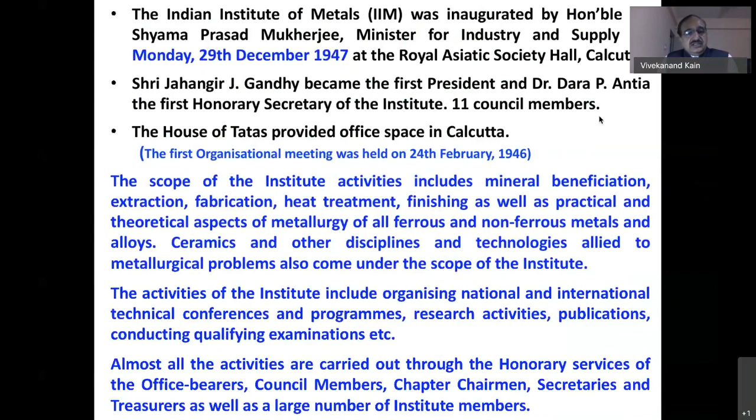At that time, several international institutes, including the Institute of Metals UK and the Institute of Iron and Steel UK, advised that India should not go for separate institutes for each subtopic in the field of metallurgy and materials. Therefore, right from that stage, the scope of the institute included all topics such as mineral beneficiation, extraction of materials, fabrication of materials, heat treatment, finishing, as well as practical and theoretical aspects of metallurgy of all ferrous and non-ferrous metals and alloys, including ceramics and other disciplines and technologies which come in the broad field of metallurgy and materials.

The vision of the institute includes increased global visibility for the IIM, cooperating with related government departments on policy formulations, focused services to industry with higher degree of industry-specific interaction, as well as career development and encouraging young metallurgists. The annual general body of the Indian Institute of Metals is typically held at the end of July every year.

And so last month itself, we had Dr. Amol Gokhale taking over as the president of the institute.

As I told you, the institute has three divisions through which it operates: Ferrous Division, Metal Sciences Division, and Non-Ferrous Division. The Ferrous Division is chaired by Shri T.V. Narendran, who is also the Vice President of the Institute. The Metal Sciences Division chairman is Dr. Samir Kamat, who is also Vice President of the Institute. And Mr. Satish Pai is the chairman of the Non-Ferrous Division and Vice President of the Institute.

The Indian Institute of Metals has more than 10,000 members.

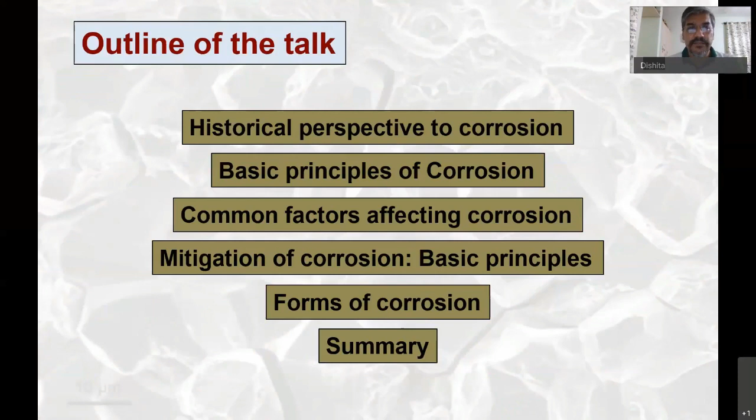So this is a brief outline of the talk. I will start with the historical perspective of corrosion. Mankind from history had a requirement of tools and weapons in their day-to-day lives. In the new Stone Age, starting around 10,000 BC, stone was used for tools and weapons, and the problem of corrosion was not faced by humans at that time because stones, being found naturally, are not prone to corrosion. The problems of corrosion started with the onset of the Metals Age, which was the Copper Age around 5000 BC, then to the Bronze Age.

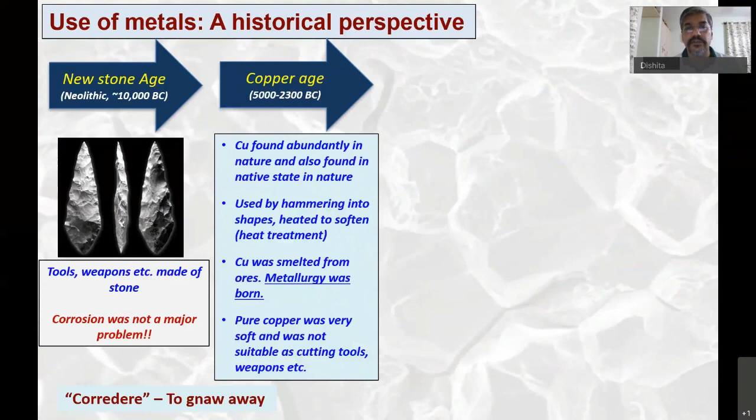In the Copper Age, initially copper was found in its native state. It was much easier to work with in comparison to stones. You can just beat copper into the shape that you want. Humans also found that by beating copper, it hardens, so it was heated to make it soft. Metallurgy was born when copper was smelted from its ores.

Subsequently, the Iron Age started around 1200 BC, when humans produced iron by smelting its ore. It is much more difficult than copper smelting because of the high melting point of iron, and thus ferrous metallurgy was born.

The first use of iron was documented around 3000 years BC, but that iron was sourced from meteors, an iron-nickel alloy, so it was very rare and highly sought after. But with the onset of ferrous metallurgy, there was more widespread use of iron, and humans realized that various mechanical properties can be achieved by its heat treatment and processing routes. And thus the problem of corrosion also started at that time.

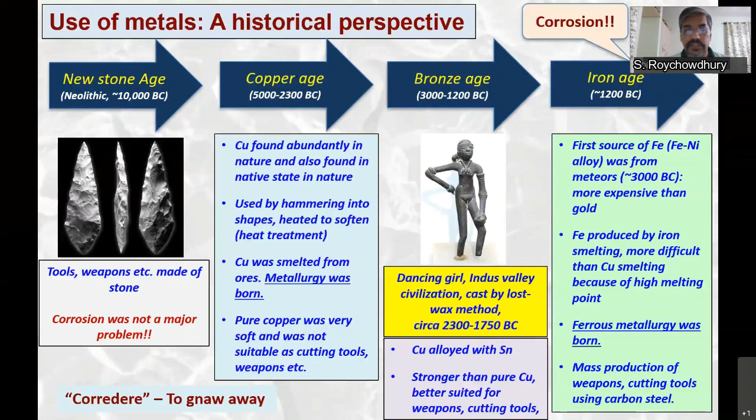Corrosion, the word originates from the Latin word corrodere, which means to gnaw away. The metal is eaten away by the environment. The first historical mention of corrosion was given by Pliny the Elder in 77 AD, where he mentioned iron as spoilt iron, iron getting spoilt due to interaction with the environment.

Subsequently, there was not much research done till around 1819, where the electrochemical phenomena of corrosion was proposed, and the laws of electrochemistry were finally formalized by Faraday in 1834 to 1840. Subsequently, humans realized that alloying iron with chromium increases its corrosion resistance. It was patented in 1865, which paved the way for discovery of stainless steels in 1913 in Sheffield, UK. In 2013, we celebrated the centenary year of the discovery of stainless steel.

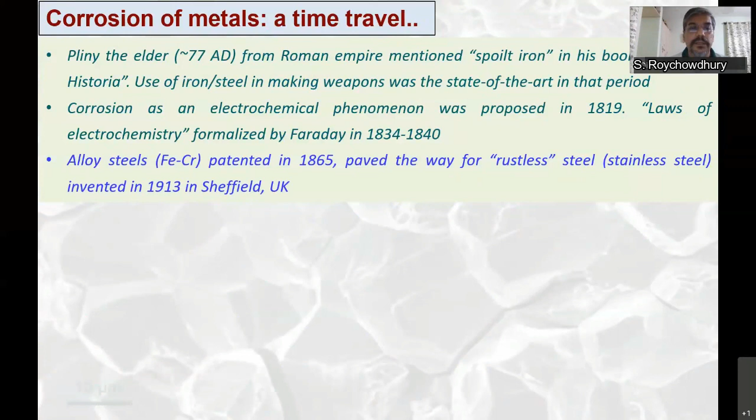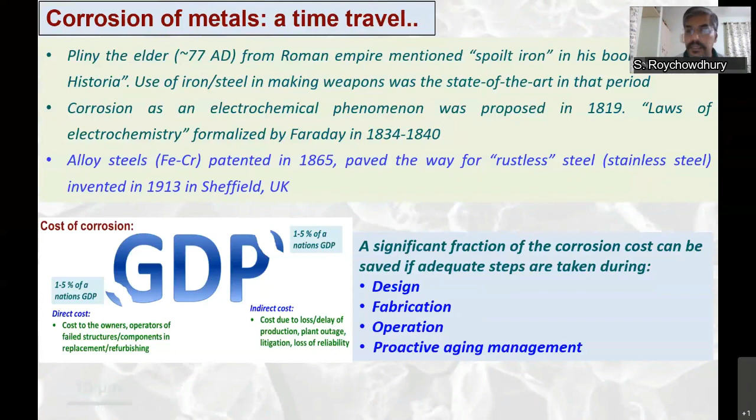But this problem of corrosion still persists, and it's said that corrosion eats away around 1 to 5% of our nation's GDP as direct cost, and an equal proportion as indirect cost. Just imagine if we can minimize this wastage due to corrosion by taking adequate steps during design, fabrication, operation, and proactive management, so that money becomes available for use in other social causes. That's why prevention and mitigation of corrosion is very important.

So I'll now come to some basic principles of corrosion. What's the driving force of corrosion? As I told you, metal, when extracted from its ores, a lot of energy goes into the metal to bring it to a high energy state. Metal is present in nature as ores, that is oxides of metal. So if we take the example of iron, it's an iron oxide. Iron will always tend to go back to its native state, and every metal will have that tendency.

Here I have taken two examples, copper and magnesium. Copper is less prone to corrosion than magnesium. When exposed to water, copper will tend to ionize and go into solution as Cu+2 ions, leaving behind 2 electrons on the surface. Magnesium being more prone to corrosion, more ions will be present in the solution and more negative charge on the metal. So a potential difference develops between this negative charge on the metal and the positive ions in the solution, and this potential difference is the main driving force for corrosion.

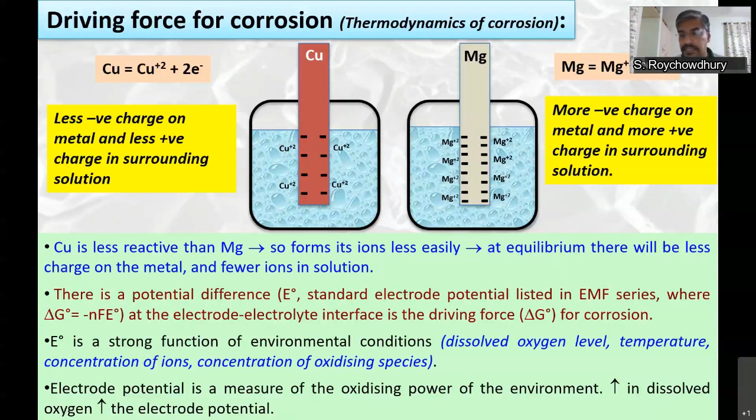This potential difference under standard conditions is called the standard electrode potential, and is related to the free energy change for this reaction. The potential is a strong function of environmental conditions, like increase in dissolved oxygen level, temperature, concentration of ions, and concentration of oxidizing species will change this potential. This electrode potential is a measure of the oxidizing potential of the environment. So higher the oxidizing potential of the environment, that is, if it's highly corrosive, the electrode potential will also be high. Just by measuring this electrode potential, we have an idea about the oxidizing nature of the environment.

Similarly, if you have ionic impurities, highly oxidizing ions like Cu+2 or Fe+3, they also take up electrons. So these are additional cathodic reactions. The more cathodic reactions that occur, the more demand there is for electrons, and all those electrons are sourced from only one reaction, the oxidation reaction.

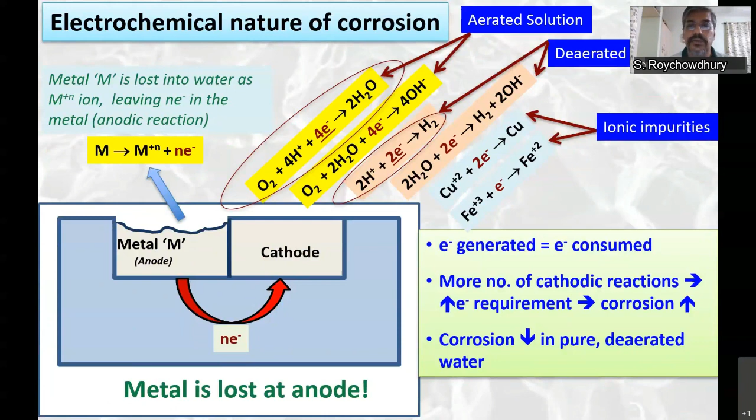Another important concept is passivity. I told you that alloying with chromium increases resistance to corrosion. So if you see in this figure, the corrosion rate comes down with increase in chromium content, but around 11% there is a drastic reduction in corrosion rate. So an iron alloy, ferrous alloy, containing a minimum of 11% chromium is called stainless steel, because it will not rust anymore.

So if I compare, how does this compare, these two alloys, stainless steel as well as carbon steel or low alloy steel? It is given schematically in this figure. The y-axis is the solution oxidizing power, the x-axis is the corrosion rate.

For carbon steels or low alloy steels, the corrosion rate will keep on increasing with increase in this oxidizing potential. But on the contrary, for stainless steels, there is a linear increase, but beyond a certain point the corrosion rate drastically reduces, and this low corrosion rate is maintained for a wide range of oxidizing potentials. Of course, when the oxidizing potential becomes too high, the corrosion rate increases again. So this is the region where you have very low corrosion rate, even though the material is anodic.

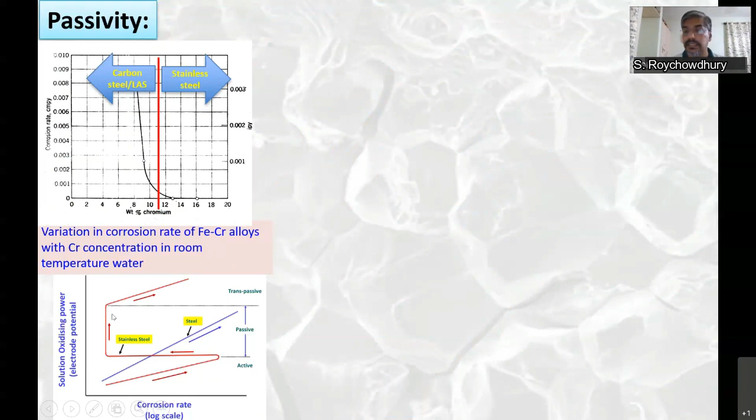So what is the reason for this? The main reason is the presence of this passive film, which is a chromium oxide that forms due to exposure of stainless steel to oxygen in air. It's highly adherent, highly protective as compared to rust. Rust is a non-adherent, flaky film. Of course, rust is also an oxide, but not adherent, flaky.

The passive film is highly adherent, very thin, and highly protective. It cuts out the supply of environment to the base metal, reducing corrosion rate. Because of its low thickness, it is transparent. So the passive film forms due to the anodic reaction, as I told you.

And the beauty is it spontaneously reforms. If it is broken due to scratching or handling, it reforms spontaneously. And you can realize that you need oxidizing conditions for this passive film to be stable. So these alloys work well under oxidizing conditions. Even though uniform, they have a different set of problems, which are localized forms of corrosion that we will see later on.

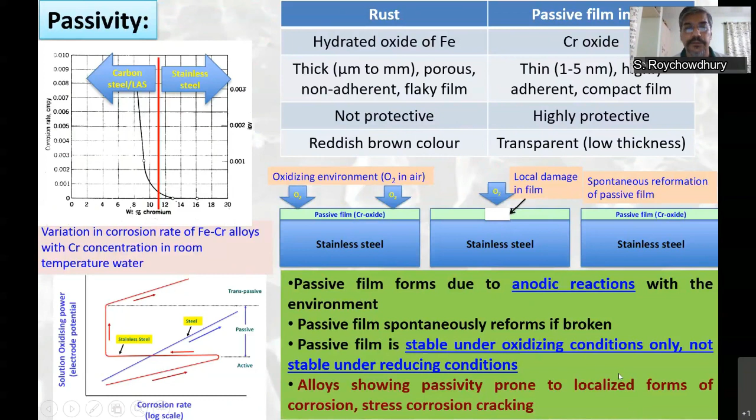So now let's come to some common factors affecting corrosion. First we'll see the effect of oxygen and oxidizers. There are various kinds of behavior possible. One behavior is that with increase in oxidizing condition, oxidizing agent, or oxygen, there is a linear increase in corrosion. This is for an alloy which does not passivate, like iron in aerated water.

The second possibility is that the corrosion rate increases, and when this oxygen concentration exceeds a certain minimum value, the corrosion rate drastically falls again. It maintains a very low value of corrosion rate for a wide range of concentration of this oxygen. So this is again because of passivity that I explained in the previous slide. And if the concentration becomes too high, then it goes into the transpassive range where the passive film degrades and dissolves.

So, for example, titanium in HCl shows only regions 1 and 2, meaning that even at very high concentrations of acid, transpassivity is not seen. Whereas in SS304 and nitric acid, you can see all 3 regions depending upon the concentration of this oxidizing environment. So that was the effect of oxygen.

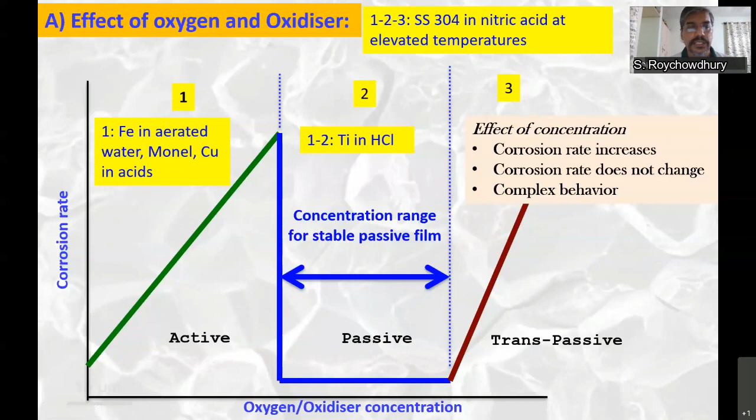Let's see the effect of flow velocity. Again, there are different possibilities. Like curve A, there's a linear increase in the corrosion rate, and then there's a sudden fall, and a low corrosion rate is maintained. So, as you can understand, this is mainly due to the active-passive transition.

So what does flow have to do with it? If there are any diffusion control reactions, it means this oxidizing species has to reach the surface in order to form this passive film.

If this oxidizing agent does not reach the surface of the metal, a passive film will not form and it will keep on corroding. Whereas in flowing conditions, it aids in delivery of these oxidizing species or oxygen to the surface of the metal and helps in passivation. So in flowing conditions, it will passivate easily. So for metals that passivate, it's good; it performs well in oxidizing environments, also in flowing conditions.

Second possibility is curve B, where there is little or no effect of flow. So these reactions are not controlled by diffusion, like iron in dilute acid. It will keep on corroding irrespective of the flow velocity.

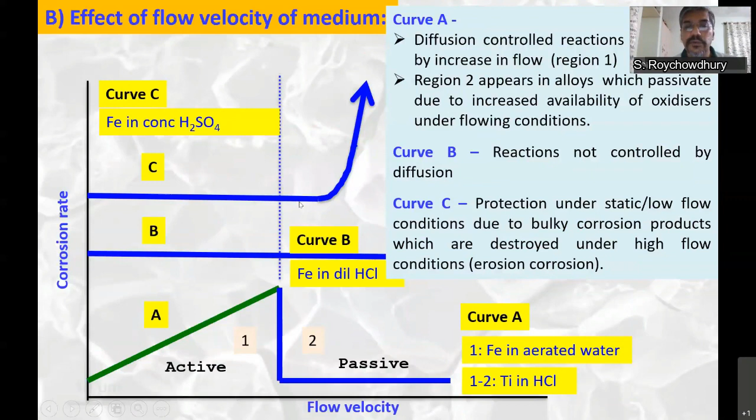Another possibility is like curve C, where the corrosion rate is low to start with, then beyond a certain flow velocity there is a sudden increase. This is mainly due to the start of mechanical effects, erosion-corrosion coming into the picture. For example, iron in concentrated H2SO4 forms a stable, protective ferrous sulfate layer, which gets removed at higher flow velocities, exposing the base metal and causing further corrosion.

Effect of temperature: again, two possibilities. Possibility A, where an increase in temperature causes an increase in corrosion rate. This is understandable because increase in temperature will always increase reaction kinetics, so the corrosion rate will also consequently increase.

Another possible behavior is curve B. Here, with increase in temperature, the corrosion rate does not increase, but beyond a certain temperature it increases rapidly. If you remember, the oxidizing potential and nature of the environment also depend upon temperature, so increasing temperature means the oxidizing potential is increasing. If you have a stable passive film, there is no increase in corrosion rate. But if temperature increases such that the transpassive region is reached, the passive film will degrade and transpassive dissolution will start. So you can see two kinds of behavior, A and B.

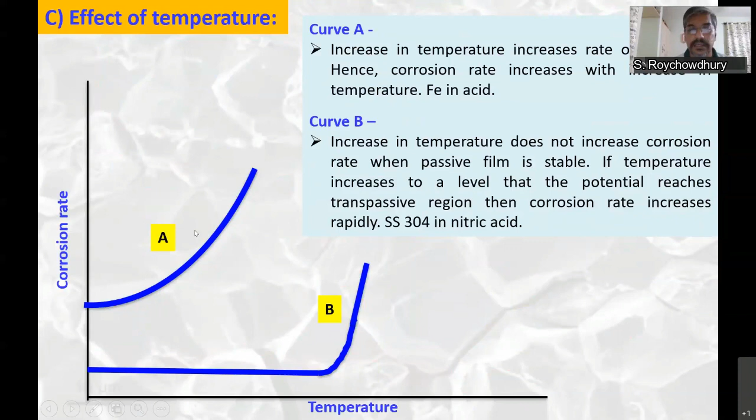Another effect is concentration of corrosive species, with two types of behavior. We'll first see behavior A, mainly for passive metals. Initially, we have a passive film, so corrosion rate will be very low even though the concentration of corrosive species increases. Beyond a certain point, the transpassive region starts and there is a rapid increase in corrosion rate.

For example, SS304 austenitic stainless steel in nitric acid: at very high concentration of nitric acid, the transpassive region is reached and it starts corroding at a high rate. This increase in corrosion rate can also occur at very low concentration, mainly due to the presence of chlorides. If chlorides are present, the corrosion rate increases rapidly even at very low concentrations, mainly due to pitting corrosion in alloys which rely on passivity for corrosion protection.

Another possible behavior is curve B, for example iron in sulfuric acid. For sulfuric acid to be corrosive, it has to ionize to give H plus ions, which take up electrons in the cathodic reaction, making the acid corrosive. So increasing concentration of H2SO4 increases concentration of H plus, and the corrosion rate keeps increasing. But beyond a certain point, if the acid concentration increases too much, ionization does not occur, so H plus ions are not available and the corrosion rate comes down. At very high concentrations, iron is virtually unattacked.

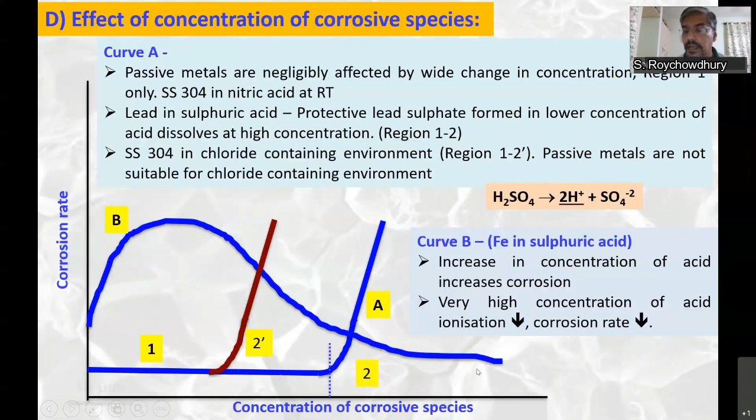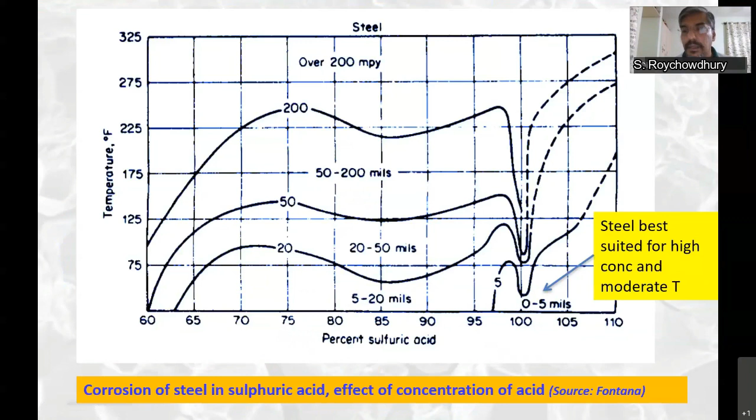If you see this isocorrosion chart, at very high concentration of sulfuric acid, in excess of 95%, the corrosion rate is very low, around 0 to 5 mils per year, if the temperature is not very high. So carbon steel is used for storing sulfuric acid as long as the acid is highly concentrated and not contaminated with water or moisture.

We'll see the effect of some metallurgical variables. Grain boundaries are inherently more prone to corrosion as they are high energy regions, so fine grain material can have a tendency toward higher corrosion. Single phase alloys are usually more resistant to corrosion than multi-phase alloys, because in multi-phase alloys galvanic cells can set up. Impurities like sulfur and phosphorus also affect corrosion rate, as do oxide and sulfide inclusions. Localized stress and strain will also affect corrosion rate, as will local differences in composition in the alloy. Very pure alloys have very good corrosion resistance, but negligible engineering application.

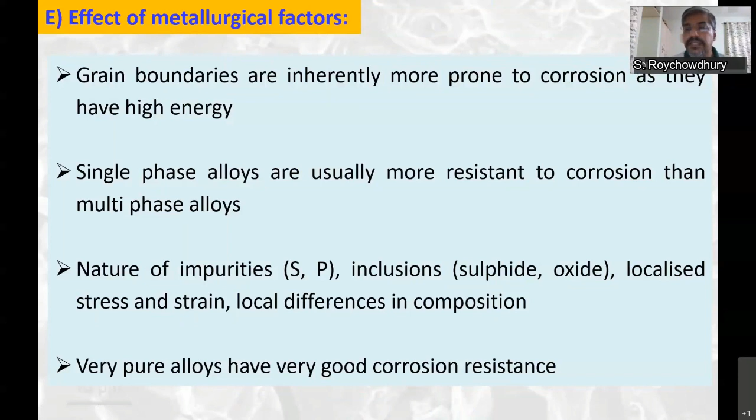Just to summarize, what kind of metals? If I take two kinds of metals, one is stainless steel which passivates and other is steel which does not passivate. If you have oxygen in the environment, stainless steel is good, steel is not good for obvious reasons because it does not passivate.

In reducing conditions, stainless steel is not good, whereas carbon steel or steel is good because again the passive film is not stable. For stagnant conditions, stainless steel is not good, steel is good. For low flow conditions, stainless steel is good. For flowing conditions where the flow velocity is low, stainless steel performs well, whereas steel is not good if diffusion control processes are controlling the corrosion reaction.

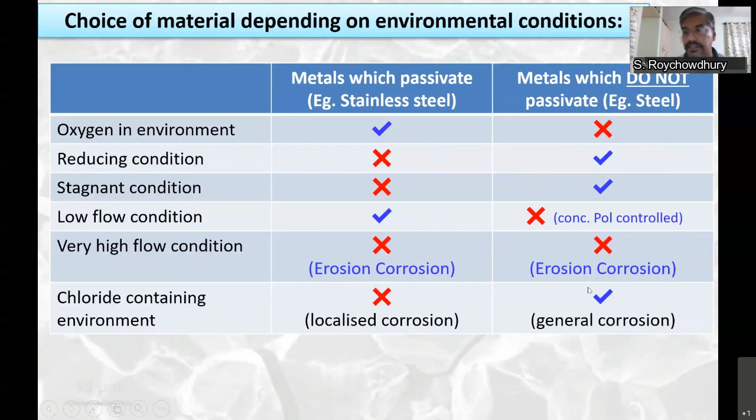For very high flow conditions, both are not good because erosion, corrosion, and mechanical effects come into the picture and both will corrode. If you have a chloride containing environment, then stainless steel's passive film is not stable and it is definitely not preferable. Steel is preferable over stainless steel. Even though steel will corrode, it will be general corrosion, that is uniform corrosion, which is easier to maintain or easier to control.

Some basic principles of corrosion mitigation. First comes material selection. For corrosion mitigation, one has to take adequate measures right from before the material is put into service. That starts with material selection. There are some typical material-environment combinations, like stainless steel in oxidizing environment, nickel based alloys like Monel in reducing environment. These are typical combinations.

For a highly oxidizing environment, like seawater, titanium is used. For highly concentrated sulfuric acid, steel is good enough. So what are the rules? Reducing, non-oxidizing environment, should use nickel, copper and their alloys. Oxidizing conditions, chromium containing alloys like stainless steel are good enough. For highly oxidizing conditions, titanium and its alloys.

The alloy should have minimum impurity. The impurity level should be very low, like sulfur and phosphorus levels should be very low. They provide good corrosion resistance. Of course, stainless steel is not the best material, it depends upon the application. It's prone to various localized forms of corrosion like pitting, crevice corrosion, stress corrosion cracking, and IGC.

So the choice of material depends upon cost. Economics comes into the picture, along with availability, ease of fabrication, forming, and welding. It's obvious to go choose a material which has the best corrosion resistance, but it also tends to be the most expensive. So you have to make a cost balance between the cost and the return on investment. Based on that, you will choose a material.

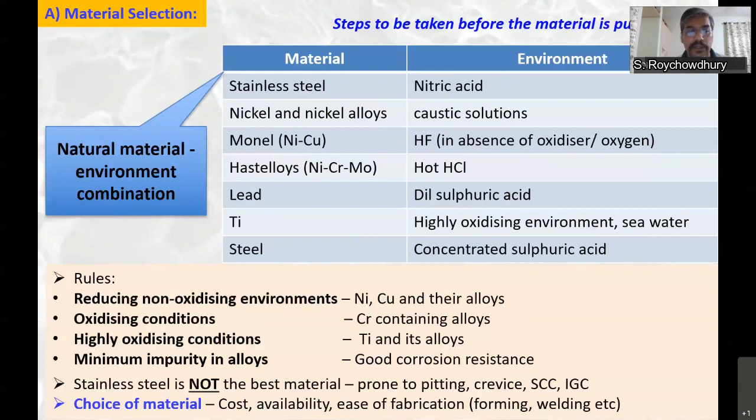Some design modifications that you can make right at the design stage, before the material is put into service.

For uniform corrosion, provide corrosion allowance, that means provide an extra additional thickness. It's possible only for uniform corrosion, not effective for localized forms of corrosion. If you know the corrosion rate and how long the structure will last, just multiply the two, and you will get the total thickness that will be lost. Provide that additional thickness in your component so that even though it corrodes uniformly, you will still have residual thickness remaining after its design life.

Some more design principles one should use. Crevices should be avoided at all costs. Like two metals in physical contact, you can have a crevice here, a tight gap in between, so they should be avoided since that leads to crevice corrosion. So instead of riveting, you do welding, because rivets form these crevices very easily.

Allow for easy drainage. Like this tank design, this is a better design, where it will empty completely and there will be no stagnant pockets. Whereas in this other design, this is not good. Even though you try to drain, it will not drain out completely and liquid traps remain.

If you have a threaded design, they act as a location of stress concentration, which is not good. They also provide a location for a stagnant region. So instead, avoid threaded joints, and rather solder, braze, or weld wherever possible.

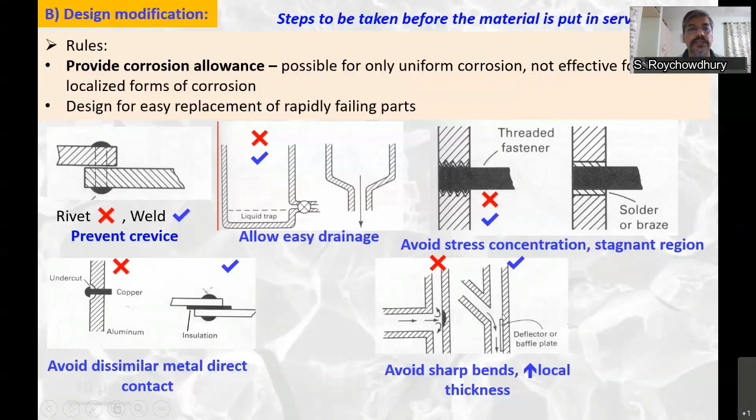Cathodic and anodic protection can be done. In cathodic protection, as I told you, there is no corrosion occurring at the cathode. Corrosion only occurs at the anode. So cathodic protection means you make the structure intentionally the cathode so as to protect it.

You can make it intentionally the cathode by using a sacrificial anode or by applying an external current source. But one has to take care that hydrogen is liberated from the structure undergoing cathodic protection, so care should be taken to avoid hydrogen embrittlement. You can prevent uniform corrosion, one form of corrosion, but you can end up with a different form of corrosion like hydrogen embrittlement. Another form of protection is anodic protection.

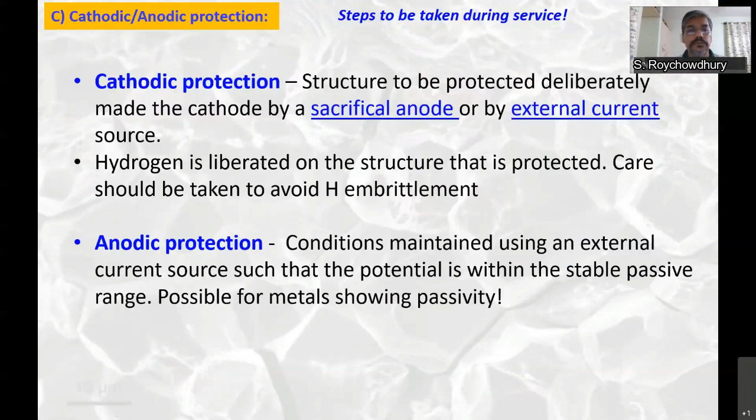This is only valid for metals which passivate. We maintain environmental conditions such that you are within the region where the passive film is stable, and that gives a very low corrosion rate, even though it's anodic in nature, the metal being anodic. Barrier coatings can also be applied.

Barrier coatings do not allow the environment to come in contact with the base metal, thus preventing corrosion. They can be thin coatings of metallic or inorganic nature. Metallic coatings are preferable because they are formable. If you bend the metal, the coating will also bend and will not peel off. That is not so for inorganic coatings.

With time, inorganic coatings become brittle and peel off easily, exposing the base metal, and corrosion will progress unabated. Porosity should be avoided in these coatings, because wherever the base metal is locally exposed, it will lead to enhanced corrosion.

Inhibitors can be added to the environment. As the name suggests, an inhibitor will inhibit either the anodic reaction or the cathodic reaction. If you stop one reaction, the other will automatically get stopped, so the corrosion rate will come down.

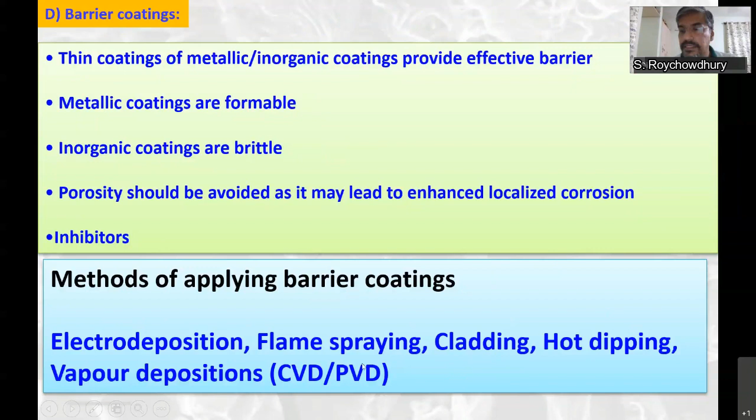Various methods of applying barrier coatings include electrodeposition, flame spraying, cladding, hot dipping, and vapor deposition like chemical vapor deposition or physical vapor deposition.

I'll now come to the different forms of corrosion and see how to mitigate these forms of corrosion.

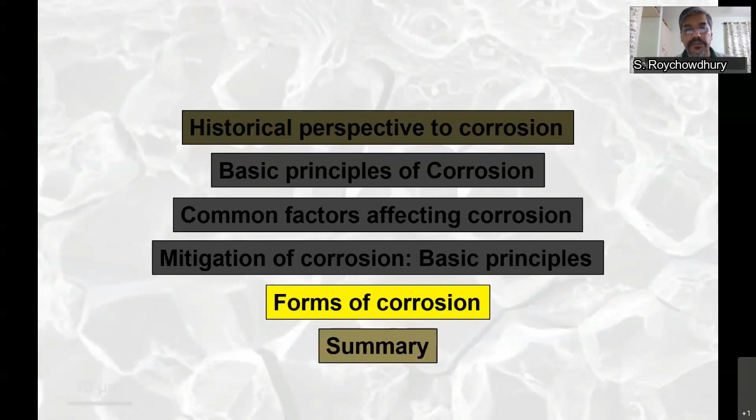You have uniform corrosion or general corrosion, for example rusting, which occurs over a large surface area, more or less uniformly. It is defined by the corrosion rate, given in mils per year. All other forms of corrosion are localized forms of corrosion. Localized corrosion can again be macroscopic, where the length scales over which corrosion occurs may be of the order of micrometers to millimeters, or microscopic, where the length scales are of atomistic dimensions.

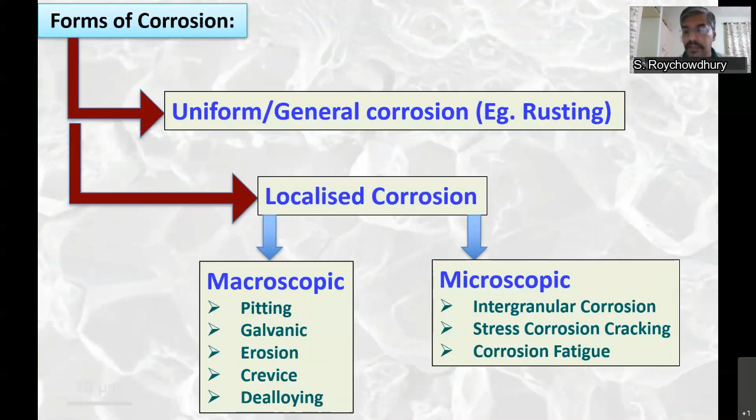We will see the different forms of corrosion and the mitigation methods. First is uniform corrosion. These are some typical images which you commonly see in the field. You can see the corrosion products. This is the most common form of corrosion, and it is responsible for loss of material.

The maximum tonnage of material loss occurs over a large surface area, and can be easily taken care of by design, by providing additional corrosion allowance. Control measures include proper material selection, barrier coatings, inhibitors, and cathodic protection, which will help in minimizing uniform corrosion.

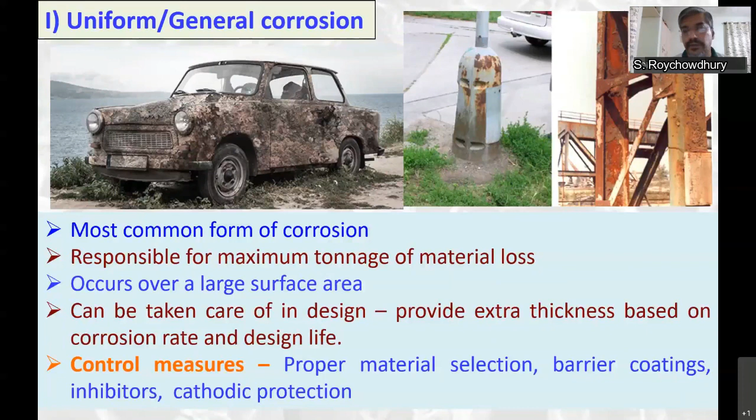But when you use highly alloyed materials like stainless steel, uniform corrosion is not a problem. Uniform corrosion rate for stainless steel, say in a chloride containing environment, will be very, very low, around 1 to 5 mils per year, but they will undergo a very severe form of localized corrosion like pitting corrosion.

The preferred location of initiation are the inclusions. When inclusions are present, they are the preferred location for pit initiation. The environment within the pit is very different from the bulk environment. It can have a very high concentration of chlorides, 3 to 10 times the bulk concentration, with pH very low, highly acidic, 2 to 3 pH, and totally deaerated. So the bulk environment is very different from the environment within the pit.

If you have a highly flowing condition, what happens? The environment within the pit gets refreshed very easily, and in that case the pit will not grow. So pit growth is favored only in stagnant conditions.

Alloys with a passive film are more susceptible to pitting. Uniform corrosion rate is less, as I told before, so material loss is actually negligible. If you measure weight change, it will be immeasurable. But it can lead to a hole or pit breaching the entire wall thickness, and at times, if under load, at the tip of the pit you can have stress concentration.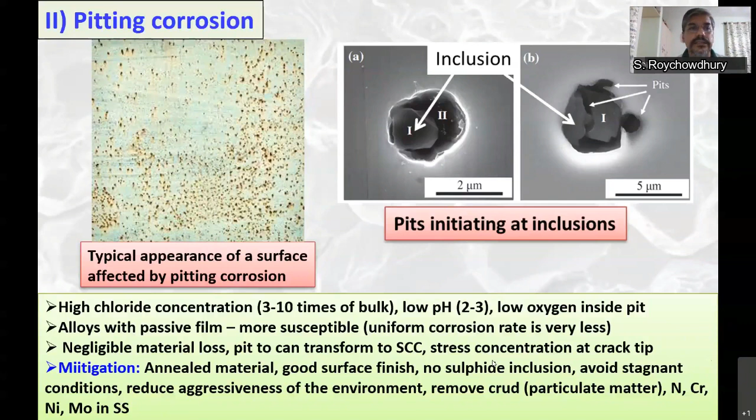If the gap is too open, it will get flushed very easily by the outside environment and crevice corrosion will not occur. Why does flushing prevent crevice corrosion? Because the environment inside the crevice is similar to that inside a pit, with the same mechanism. So any flushing or flowing condition will prevent crevice corrosion.

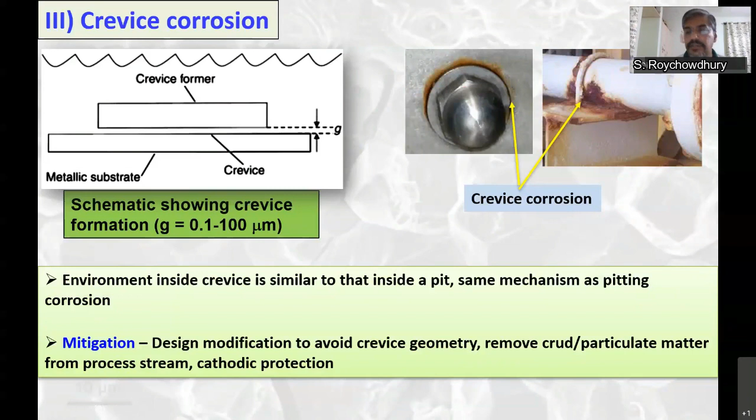Mitigation is mainly by design modification. Avoid such crevice geometry—as I told before, weld instead of rivet. Remove crud or particulate matter, as they settle down and promote stagnancy and crevice formation. Cathodic protection can also help in preventing crevice corrosion.

The next form of corrosion is galvanic corrosion. Every metal has a tendency to corrode, given by its potential. Two metals with different tendencies to corrode will have different such potentials. If they are in electrical contact and exposed to an environment, suppose metal A is highly prone to corrosion and metal B is less prone to corrosion.

If they are in electrical contact, metal B will preferentially become the cathode. So the more corrosion-resistant metal becomes the cathode and will no longer corrode. The metal which is less resistant to corrosion becomes the anode and will now corrode at a much higher rate than it would have if they were not in contact.

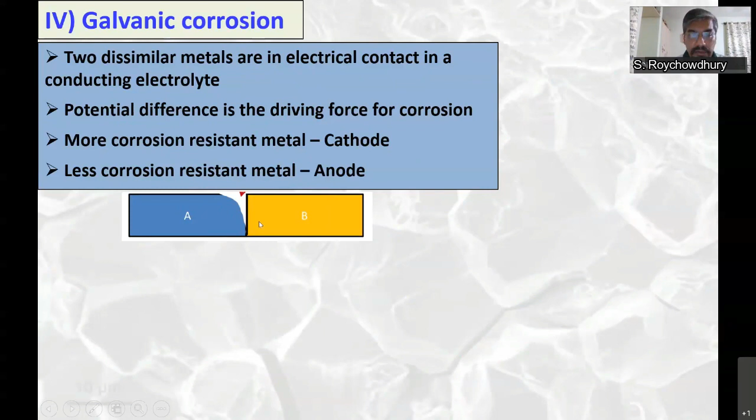So how to choose metals? Metals and alloys should not be widely separated in the galvanic series. If they are widely separated, the driving force for corrosion is much higher. So within a group, metals and alloys can be used together.

Metallic coatings are used to reduce separation. If you cannot avoid electrical contact between two largely separated metals, use a coating or film in between that is intermediate in the galvanic series, so that the gap reduces.

Use of inhibitors and deaeration will reduce the corrosivity of the environment. Cathodic protection will help so that both metals become cathodic and will not corrode. Metallic coatings like galvanizing—zinc coating of iron—also help minimize galvanic corrosion, because zinc acts as a sacrificial anode and the base iron is protected.

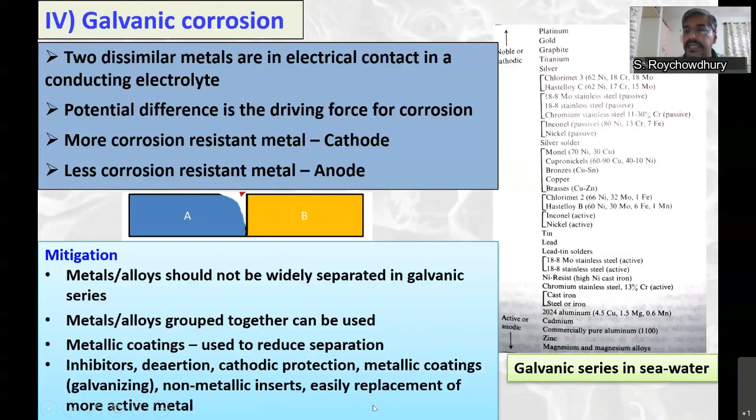Non-metallic inserts, as I told you, help because they break the electrical contact. If none of this can be done, design in such a way that the more active metal is easily replaceable, so you can replace it from time to time. The next form of corrosion is intergranular corrosion.

As the name suggests, here the corrosion occurs preferentially at the grain boundaries. Grain boundary always has a higher tendency to corrode, but under certain conditions, the tendency to corrode increases manifold, for example sensitization in austenitic stainless steel, 18-8 stainless steel, which contains around 0.08% carbon.

During welding, as shown here, this is the weld deposit. This region away from the weld is exposed to the temperature range of 500 to 850 degrees. And not only that, the residence time, given by this temperature variation, within this range of 500 to 850 is much longer for this region from B to C. This curve corresponds to point B, and this to point C. So in all the region between B and C, the residence time is much more.

So what happens? Chromium carbide forms at the grain boundaries, Cr23C6 is the formula, so one atom of carbon takes away almost 4 atoms of chromium. So you have a chromium depleted region here, where the chromium concentration falls below 11%. This region adjacent to the grain boundary is no longer stainless, but within the grain it is still stainless steel. So when it is exposed to the environment, grain boundaries are the regions where it will corrode preferentially. These dark regions are the regions of preferential attack along the grain boundaries.

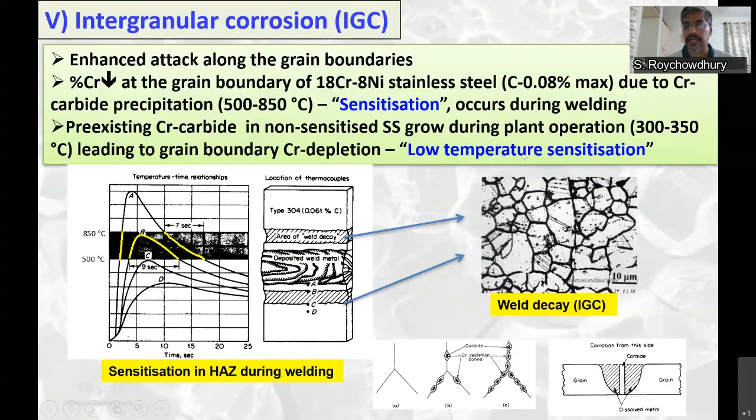What is the advantage? If you have very low carbon to start with, then if you have any pre-existing carbide but non-sensitized stainless steel, during normal operation in the temperature range of 300 to 350, these carbides will grow over a period of time, say 10 to 15 years, and finally lead to sensitization. This is called low temperature sensitization, where no new carbides precipitate, but pre-existing carbides grow. So such LTS, further lowering carbon minimizes that chance also.

Addition of nitrogen not only retards sensitization, but also brings up the strength level of the stainless steel, because by removing carbon you sacrifice strength. But you cannot have too much nitrogen, because if it exceeds 0.16%, then chromium nitride will precipitate and sensitization can occur.

Addition of elements such as titanium and niobium - they are strong carbide formers in excess of 900 degrees centigrade. If you give this stabilization heat treatment, the titanium and niobium carbides form, so subsequently no free carbon is available for chromium carbide precipitation and sensitization. But all this stainless steel has to be handled very properly during all stages of fabrication.

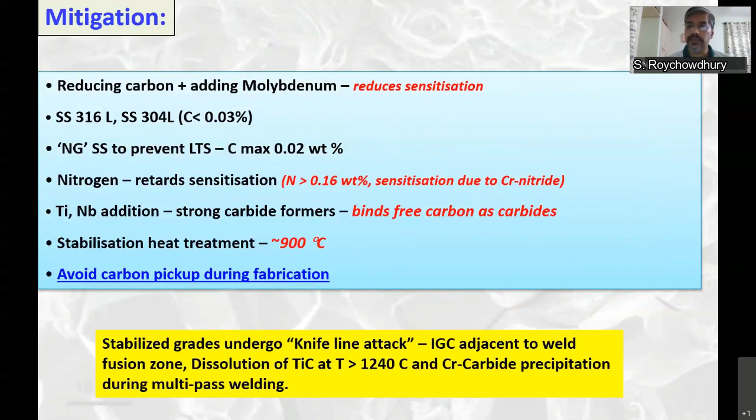They undergo another form of IGC called knife line attack, which is immediately adjacent to the weld fusion zone, as opposed to sensitization which is at some distance away from the weld. So what happens during the first pass of welding? In the region adjacent to the weld fusion zone, where the temperature exceeds 1240 degrees centigrade, the titanium carbide dissociates and free carbon comes into solution. Subsequent multi-pass welding will lead again to chromium carbide precipitation, and again IGC will occur.

Selective leaching, or dealloying, as the name suggests - one alloying component of an alloy preferentially dissolves out or corrodes out, leaving behind a porous structure which has very poor mechanical properties. Common example is dezincification in copper-zinc alloys, where zinc dissolves out and copper is left behind, which is porous. Also for gray cast iron, it's called graphitization, where you have graphite flakes and this network of graphite flakes is left behind while iron dissolves, leaving weak mechanical properties.

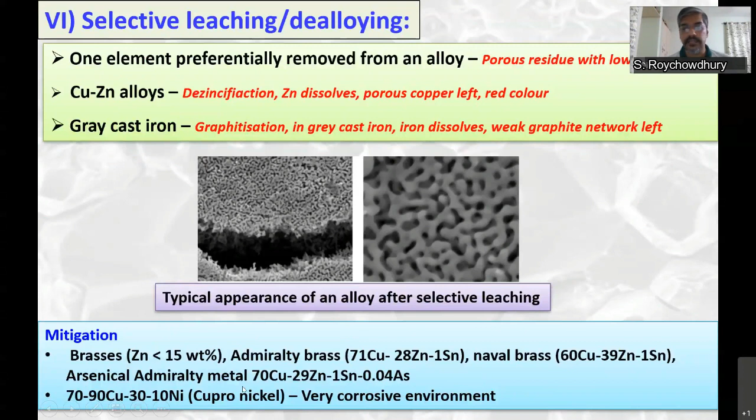Mitigation: use different materials like very low zinc brasses, less than 15% - this problem is more severe in copper with 30% zinc alloys, so if it's less than 15%, the problem is less. Addition of arsenic or tin will again reduce this problem of selective leaching. So if the alloy or the environment is highly corrosive, instead of zinc alloying, go for nickel alloying, like cupronickel, which is very conducive for very corrosive environments.

The next form of corrosion is stress corrosion cracking.

So this is the first time the cracking word comes into the picture. It means that cracks form. Let me give a historical perspective.

First, it was reported in season cracking of brass, where during World War, the British forces saw that these brass cartridges, which were cold drawn, cracked during monsoon. The main reason for cracking was availability of ammonia due to rotting of organic waste. Being cold drawn, brass cartridges had a lot of residual tensile stresses, and brass being prone to SCC. So all these three factors led to SCC.

Similarly, caustic embrittlement - there were a lot of instances of carbon steel boilers exploding in the United States in the late 1800s. Those accidents were the genesis for the ASME boiler and pressure vessel code. The main reason for this IGSCC was presence of caustic soda in the water, tensile stress due to operational stresses, and the material was carbon steel boilers. So you need three factors.

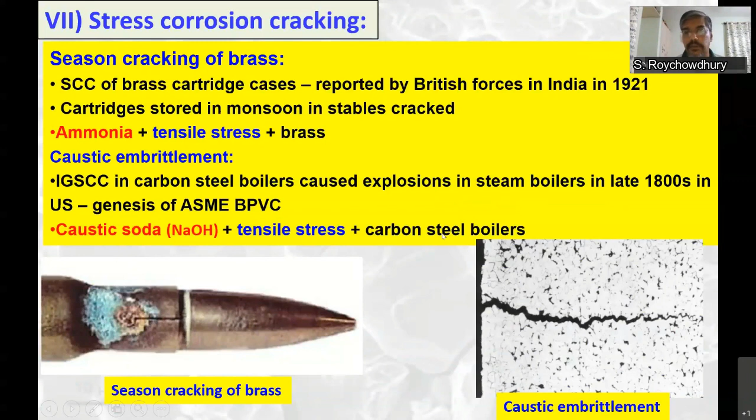You need a conducive material which will tend to crack. For stainless steels, what is the material condition? Sensitization, or low temperature sensitization. And of late, over the last maybe 15 years, it's seen that even if the austenitic stainless steel is non-sensitized, with no chromium carbide precipitation, it can still undergo IGSCC in reactor environment - high temperature, high pressure water - if it is strain hardened.

So what I mean by IGSCC - there are two modes of cracking. In TGSCC, transgranular, the cracks grow across the grains, and in IG, the crack grows along the grain boundaries. Some features of SCC: it's a subcritical crack growth mechanism.

Even if the crack length is less than the critical crack length, it will keep on growing. From a mechanical point of view, as long as the crack is less than the critical crack length and K, the crack driving force, is less than K1C, the fracture toughness, the crack is not supposed to grow. But it can grow due to stress corrosion cracking - SCC is one of those subcritical crack growth mechanisms.

These SCC cracks are very tight, and all the corrosion processes occur at the crack tip, which is only a few atoms in diameter. Detection of such tight cracks during in-service inspection is very, very difficult. Sizing of cracks is also very difficult.

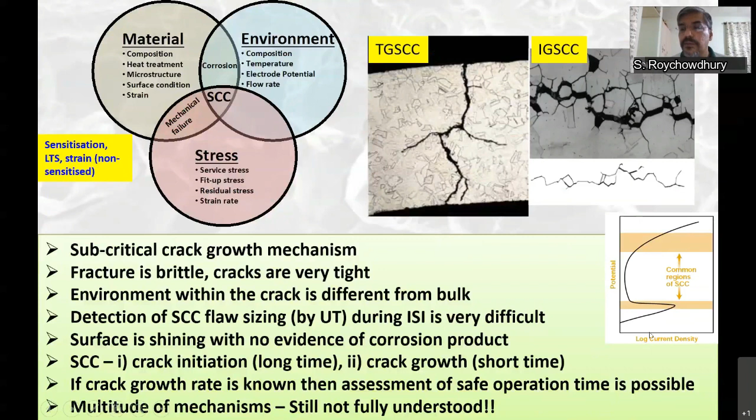How to minimize this? We are talking about stainless steels now. Nickel content has a very important role to play. This is shown in the boiling magnesium chloride test, which evaluates susceptibility to SCC - it's an ASTM standard test. If you see around 8 to 10% nickel, you see the minimum time to failure, indicating that the cracking is very fast.

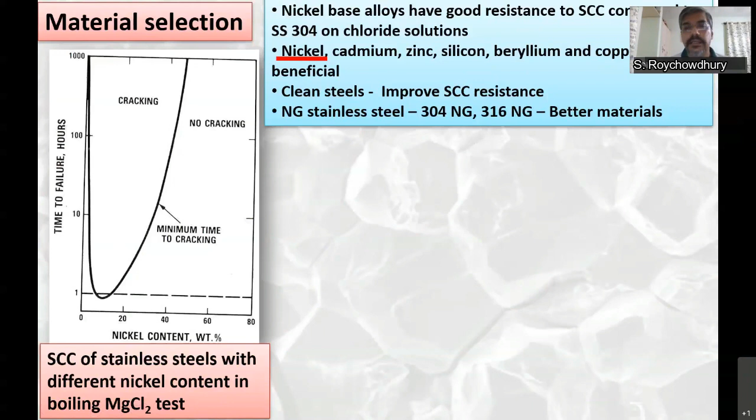This is the alloy composition for SS304, which contains around 8 to 10% nickel. So 304 will crack very quickly in boiling magnesium chloride. As I told you, nickel concentration is very important. This is another curve showing the SCC susceptibility in high temperature water.

So here, see all this nickel concentrations. There's a wide variation range of nickel concentration where you have very low susceptibility to SCC. So I will highlight 3 alloys.

Alloy 800, which is the steam generator tube used in our nuclear power plants, lies in this base of this bucket, which indicates it has very low SCC susceptibility. So we have very good experience in our nuclear reactors, no IGSCC occurrences.

Similarly, for alloy 690 also, very low susceptibility to IGSCC. But alloy 600, which was initially used as steam generator tube material, has very high susceptibility to IGSCC in this high temperature water simulating nuclear environment.

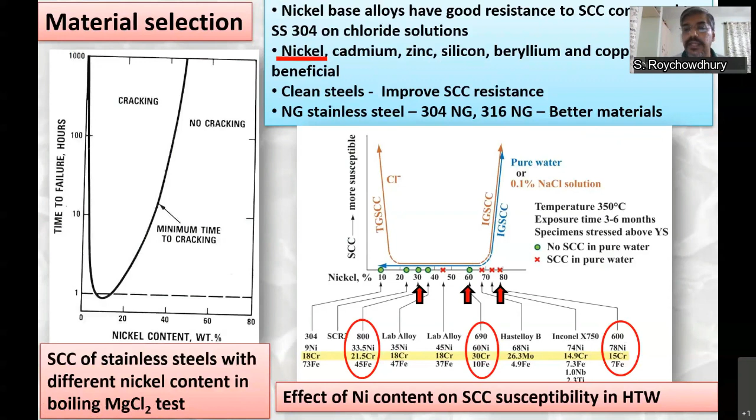So all this material is good enough if it is handled properly. So what I have shown here in this figure is certain things that can go wrong during fabrication stage or during handling or during storage, which can compromise this high resistance to SCC.

So if this stainless steel comes in contact with non-stainless steel equipment, like carbon steel, there's every chance that a small chip of iron can break off from those carbon steel tools and embed into the stainless steel surface. Now this embedded iron is prone to corrosion, it will corrode, rust, and there is a volume expansion which will lead to generation of local tensile stresses.

And during long-term storage or during operation, or when this part gets exposed to, suppose, a marine environment, even at room temperature, under presence of chlorides, it will undergo TGSCC, and the crack will grow.

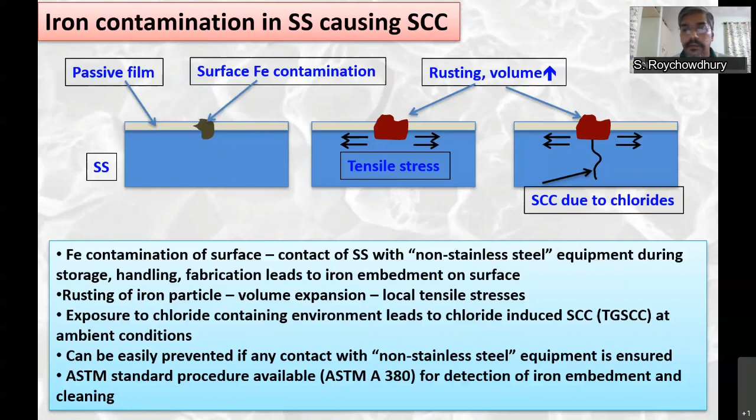So there are various standard methods. ASTM standard method like A380 gives a procedure for detecting such iron contamination, along with its cleaning procedure.

Some environmental control steps that you can do: eliminate the critical environment necessary for SCC. As this figure shows, the combination of dissolved oxygen and chloride concentration is very important. So this is the SCC safe area.

So low dissolved oxygen levels, if you have totally deaerated, very, very low dissolved oxygen, then you can tolerate a higher concentration of chloride without occurrence of TGSCC.

But if the dissolved oxygen is high, then you cannot tolerate very high concentration. The chloride concentration has to be very low, meaning the water purity has to be very good for SCC resistance.

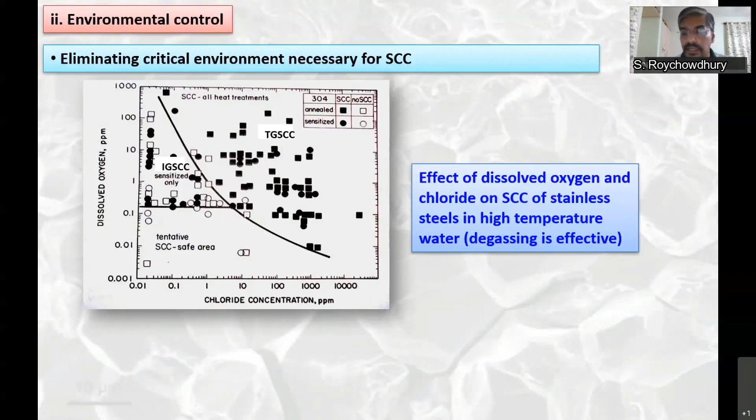Cathodic protection can help. As I told, during cathodic protection, hydrogen is evolved, and hydrogen related SCC is one of the mechanisms, so hydrogen aids in SCC growth. So if that is the mechanism operative, then cathodic protection will not help.

Design modification can lower the stresses. If the stresses are low, crack growth rate will be low. Tensile stresses are needed for SCC to initiate and grow. So instead of tensile, you can introduce surface compressive stresses.

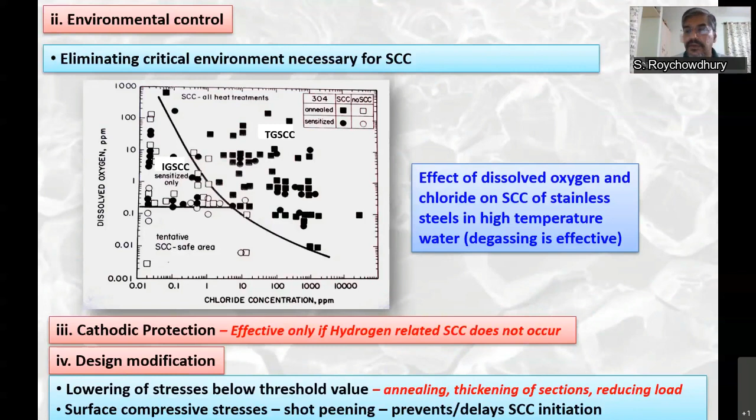That can be done by shot peening. So very high hardness balls, shots impinged or repeatedly onto the surface, that introduces compressive stresses onto the surface, and that will prevent SCC initiation.

Some stopgap measures you can take, like heat sink welding or last pass heat sink welding. This is mainly for pipelines. So when you're welding two SS pipelines, after the root pass, you pass cold water from the ID side when you are doing the subsequent passes to fill up that gap.

So what happens, because of the water, the internal surfaces of the SS will not rise to temperatures reaching that 500 to 850 range, so that sensitization will be avoided.

Also, this last pass heat sink welding, in which you pass cold water in the last pass of the welding, introduces a reversal of residual stresses from tensile to compressive on the ID side. That will again help in preventing SCC.

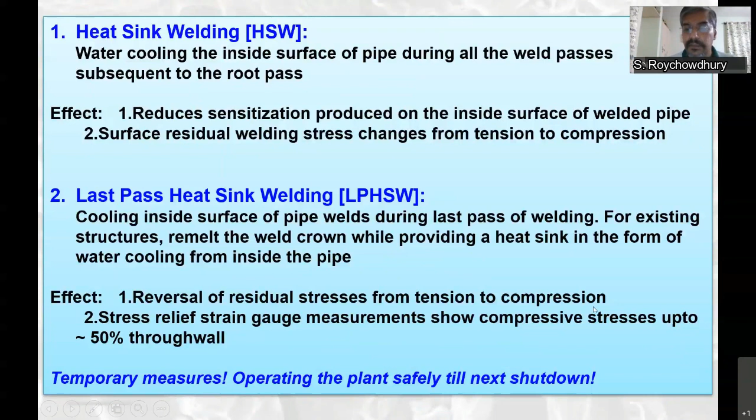But these are, of course, temporary measures, operating the plant safely till your next shutdown.

Hydrogen damage, as the name suggests, hydrogen enters into the metal. Hydrogen is present in the metal in the atomic form H, and that will cause damage to the metal. What are the sources of hydrogen?

Cathodic reaction is one source, where hydrogen can be picked up onto the metal. Cathodic protection also liberates hydrogen, so hydrogen can enter into the metal. In the water environment, if you have ions of phosphorus, arsenic, antimony, these also promote hydrogen pickup by the steel. Another source of hydrogen is during welding.

During welding and heat treatments, like if you're welding carbon steel plates and the weld electrode flux has moisture present in it, that moisture can dissociate under welding arc temperatures and generate hydrogen, which can go into the weld metal and cause embrittlement.

So what are the different types of damage? Hydrogen blistering occurs if you have pores inside the metal. Atomic hydrogen diffuses into those pores, and inside the pores it recombines to form hydrogen molecule gas. Once the gas forms a molecule, it cannot come out of those closed pores, leading to high internal pressure that causes rupture of the steel, even though the external load is very low, because the internal pressure adds up to that external load.

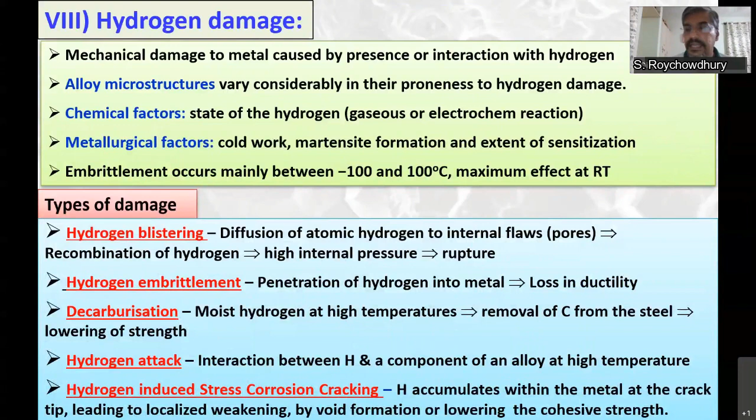Decarburization and hydrogen attack. Hydrogen attack mainly occurs at high temperature, moist environments in which hydrogen reacts with one of the alloying elements in the steel. It can react with carbon and remove it from the steel surface, causing decarburization. The problem is, if you remove carbon, the strength comes down, so the material becomes weak. Hydrogen attack inside the metal at high temperatures can also react with carbon and form bubbles of methane, CH4, inside the metal. Again, the problem is internal pressurization.

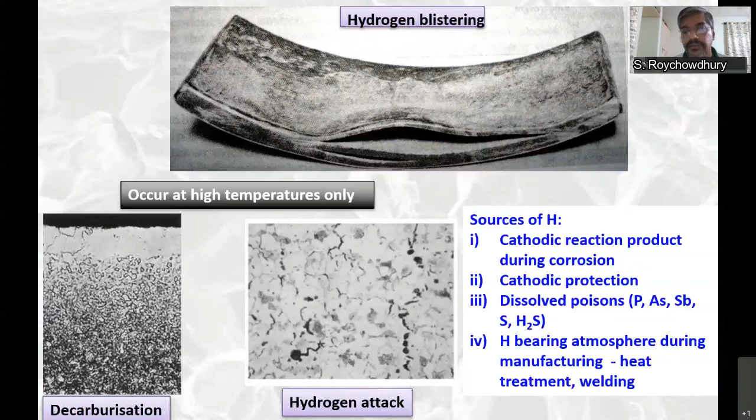Another problem is stress corrosion cracking. As I told you, hydrogen-related SCC is one mechanism. So if that mechanism is operative, presence of hydrogen will aggravate the situation.

Mitigation: blistering can be avoided by avoiding pores. Use clean steel so it does not have any pores inside. If the steel is clad by stainless steel or nickel, which is impervious to hydrogen, then hydrogen will not be picked up. Reduce corrosion so hydrogen generation is reduced. Remove poisons like arsenic and antimony from the environment, which will reduce hydrogen pickup. Use better materials — the higher the strength of the material, the more prone it is to hydrogen embrittlement or hydrogen damage. Softer, low strength materials have better resistance to hydrogen damage.

So if you're talking about steel, martensite is one high hardness phase. If a lot of martensite is present, the steel is very hard and has very poor resistance to hydrogen embrittlement. If it has a soft ferrite-pearlite microstructure instead, it will have higher resistance to hydrogen embrittlement.

For hydrogen embrittlement, again, reduce corrosion rate. Alter plating conditions — in electroplating, the material to be plated is made the cathode where hydrogen evolves, so altering plating conditions can minimize hydrogen evolution and pickup. If hydrogen is picked up, you can always bake it out at around 100 to 650 degrees, so the hydrogen comes out and you restore the original ductility of the material. Lower strength materials are better.

During welding, one has to take utmost care that welding electrodes are completely dry. Welding electrodes have to be baked nicely before welding. They should be removed from the baking furnace immediately, or just before welding, and taken directly for welding after retrieving from the furnace, so that there is no chance of moisture pickup.

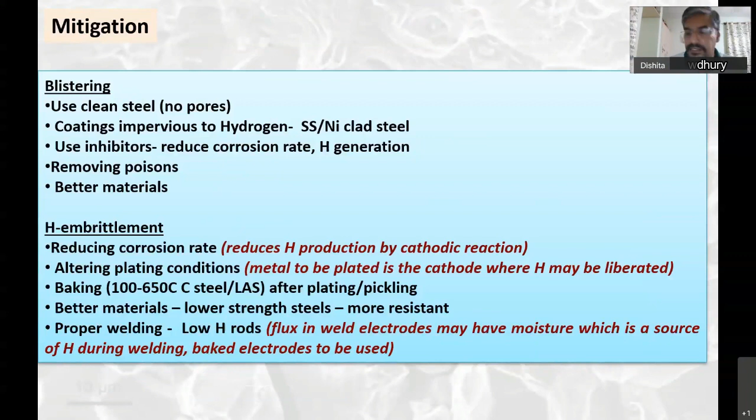Biological corrosion is not a separate form of corrosion. It's mainly due to bioactivity on the material, like barnacles sticking onto the surface, presence of algae, presence of fungus on the metal surface. They affect corrosion by directly influencing anodic and cathodic reactions.

It can enhance one of the reaction rates — if the cathodic reaction rate is enhanced, the anodic reaction will automatically get enhanced too. It can also influence protective surface films, which can be compromised due to bioactivity, exposing the base metal to higher corrosion. This aggravates corrosion conditions by producing acids locally and producing deposits. If you have deposits, you get stagnant conditions, which promote pitting corrosion and crevice corrosion-like situations.

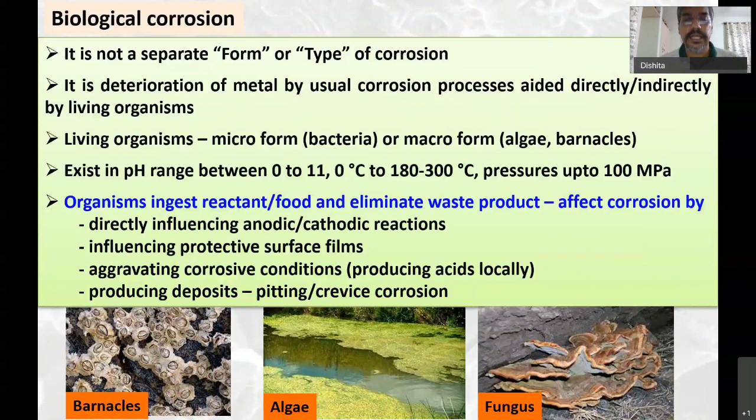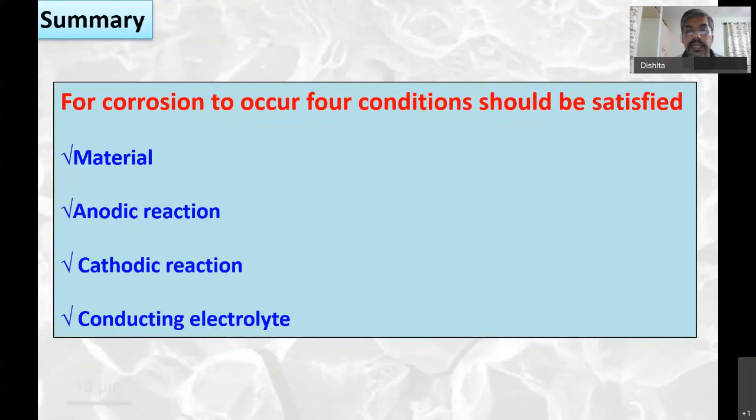So finally, to summarize: for corrosion to occur, you need four factors — material, an anodic reaction, a cathodic reaction, and a conducting electrolyte. You can prevent and control corrosion through proper material selection, taking care of alloy composition, microstructure, and cold work, and by taking adequate steps during design. These two steps can be taken before the material goes into service, and during service you can control the environment by purity, minimizing the concentration of corrosive species, composition of the environment, barrier coatings, temperature, pH, oxygen, agitation, and addition of inhibitors to the environment. All of these will control your corrosion. Many times you cannot prevent corrosion, but you can control it.

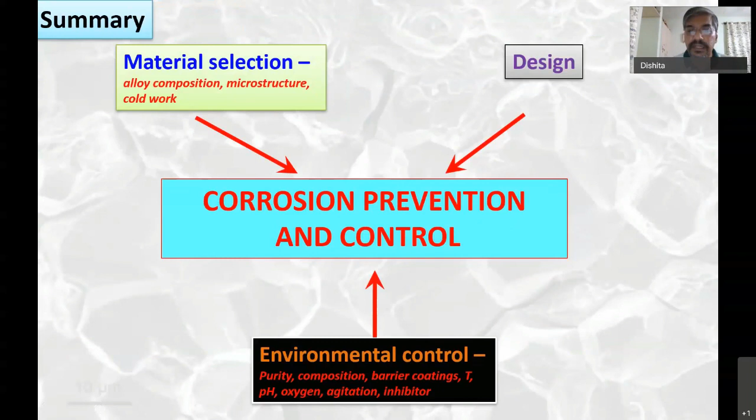Then your life will be easier. So with that, I will conclude.